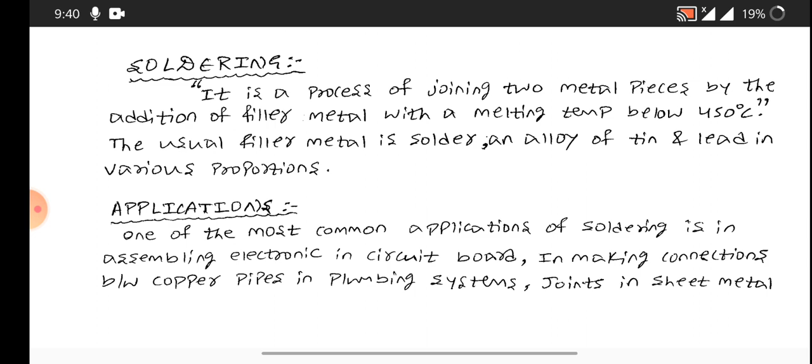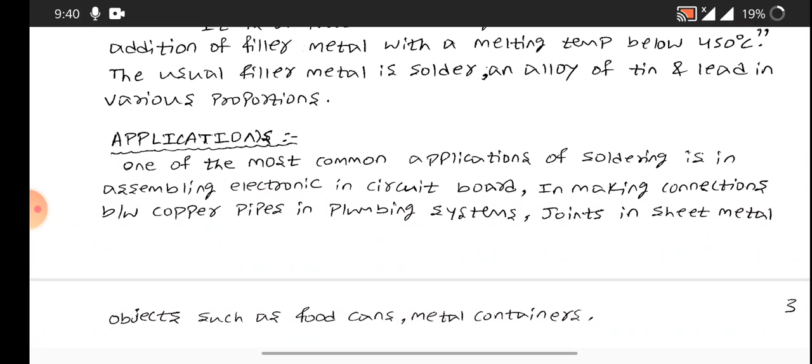So when it comes to application of soldering, the most common application is in assembly of electronic circuit boards, also in making connections between copper pipes in plumbing systems and joining sheet metals. You can find the application of soldering.

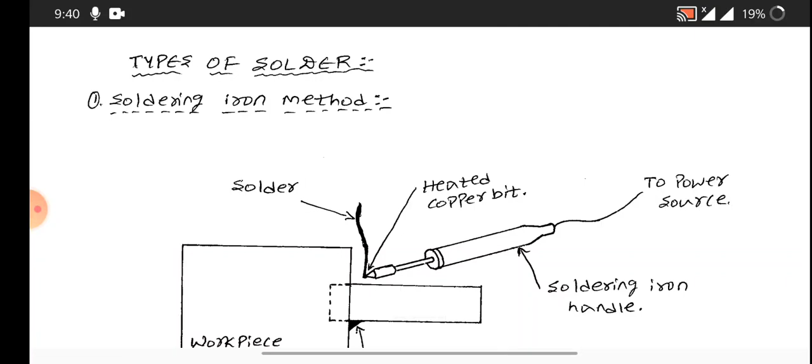So when I say soldering, there are different types of soldering methods. So we'll discuss a few. The first one is the soldering iron method. You can see the figure. So before you go for soldering, you should make sure that the workpieces to be joined are cleaned thoroughly by removing all the contaminants and making the surfaces clean and ready for soldering.

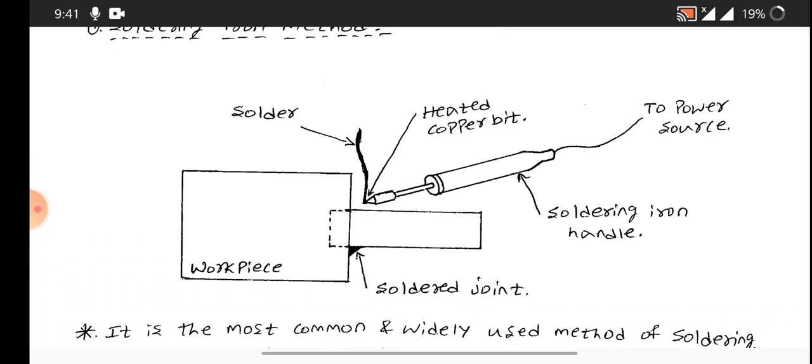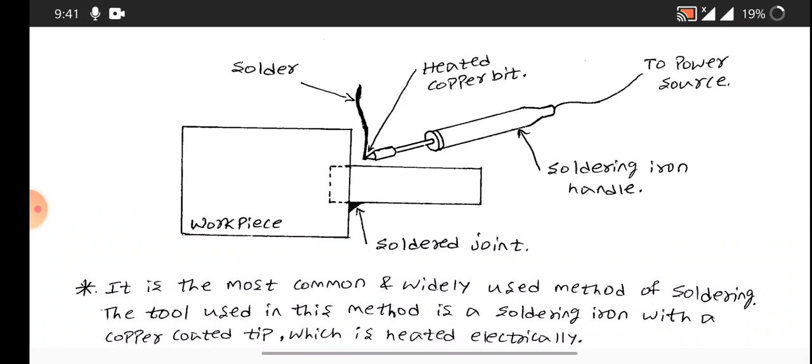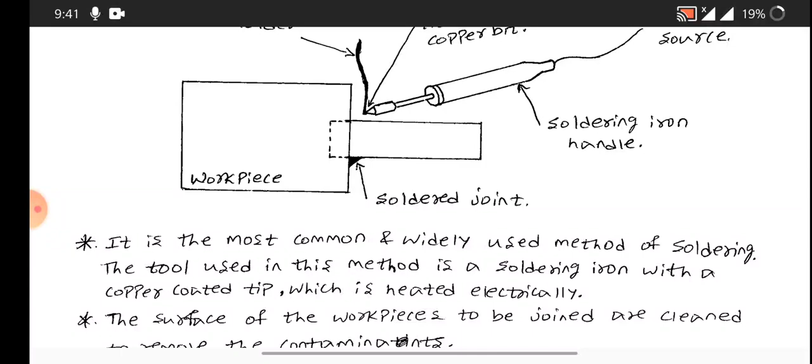So in the soldering iron method, we are going to use a soldering iron handle where we are going to melt the solder at the tip of this soldering iron handle, and the same solder is going to be transferred into the gap between the two workpieces. It is the most common and widely used method of soldering. The tool used in this method is a soldering iron with a copper coated tip which is heated electrically. So we need power supply for this.

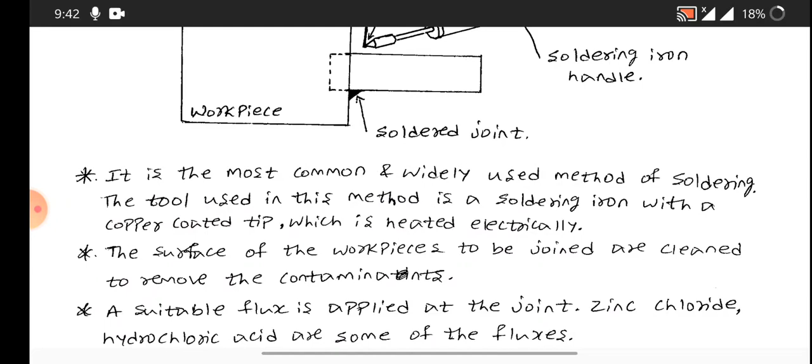So the surfaces of the workpiece to be joined are cleaned to remove all the contaminants, as I said. We have to use a suitable flux which is going to be applied at the joint in order to avoid oxidation. The commonly used fluxes are zinc chloride, hydrochloric acid, etc.

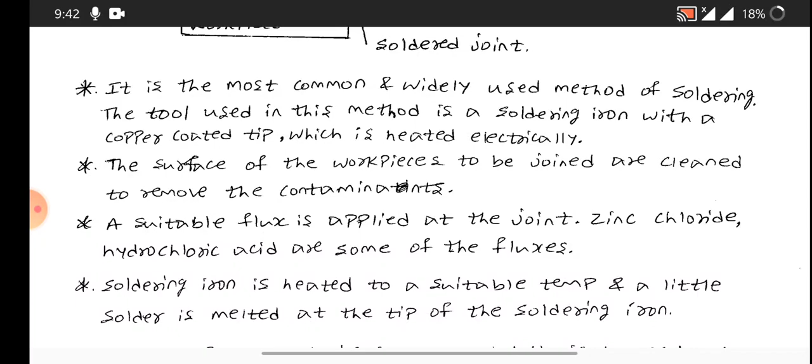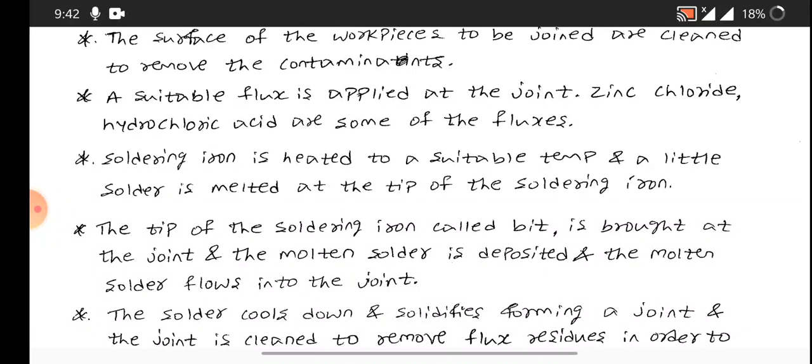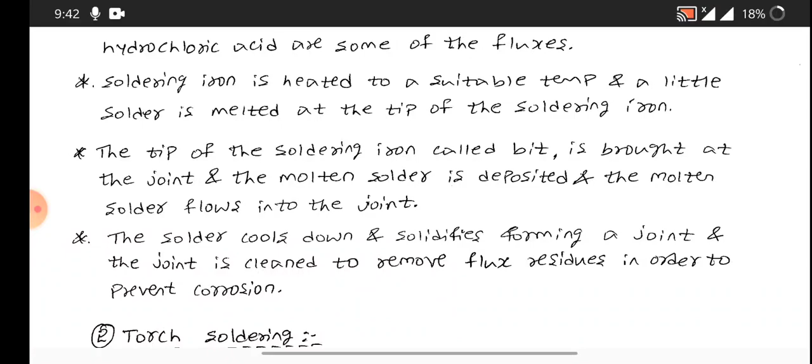So in the process, first we need to heat the soldering iron to a suitable temperature, and a little solder is melted at the tip of the soldering iron. The tip of the soldering iron is brought to the joint, and the molten solder is transferred, or you can say deposited, and the molten solder flows into the joint. Then you should allow the solder to cool and let it solidify, forming a joint, and the joint is cleaned to remove the flux residues in order to prevent corrosion.

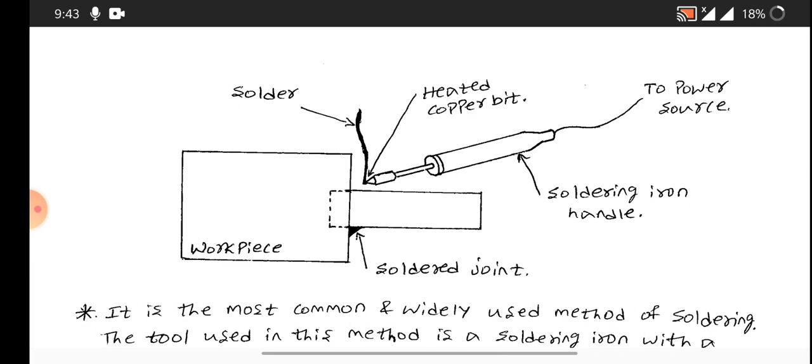So you can see the figure. We have two workpieces, and wherever there is a joint, we need to get the soldering iron, and at the tip of the soldering iron we need to melt the solder, and the same solder is transferred into the joint, and the solder is going to flow into the joint, fill up the joint, and we're going to get the soldering joint.

So the next type is torch soldering. See, when I say soldering, the working is the same in all the types, but the only difference is the method of heating or method of melting the solder. In torch soldering, the required heat is supplied by the flame of an oxyacetylene gas torch. We know what oxyacetylene welding is, which we discussed in the previous session. So the same oxyacetylene mixture is used in a gas torch in order to supply the heat to melt the solder.

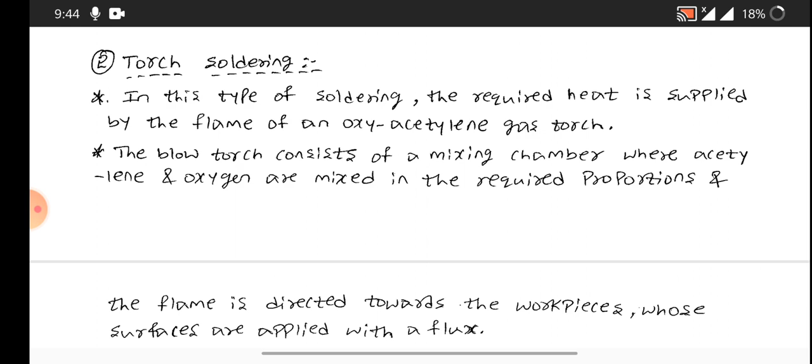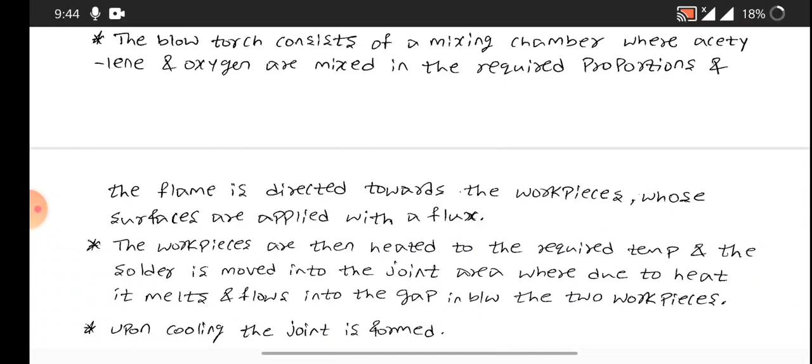So the blowtorch consists of a mixing chamber where the acetylene and oxygen are mixed in the required proportions, and the flame is directed towards the workpiece whose surfaces are applied with the flux. And one more thing, when you go for soldering, first you need to heat the workpieces to be joined, then you should go for depositing the filler metal, that is solder. When the workpieces are heated to the required temperature, the solder is moved into the joint area where due to heat it melts and flows into the gap between the two workpieces.

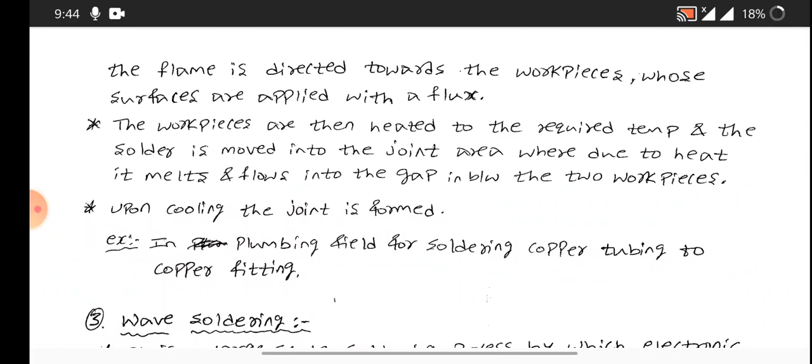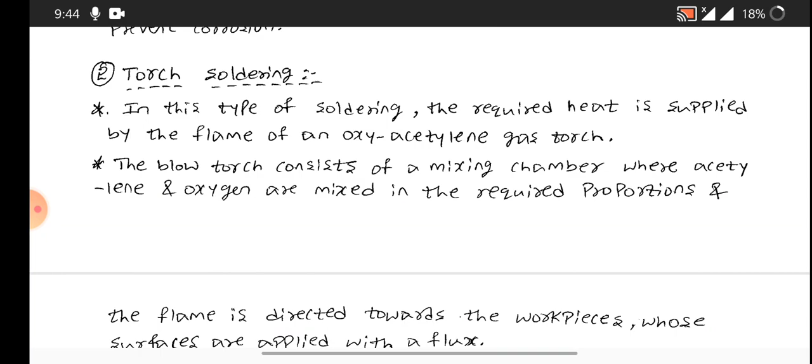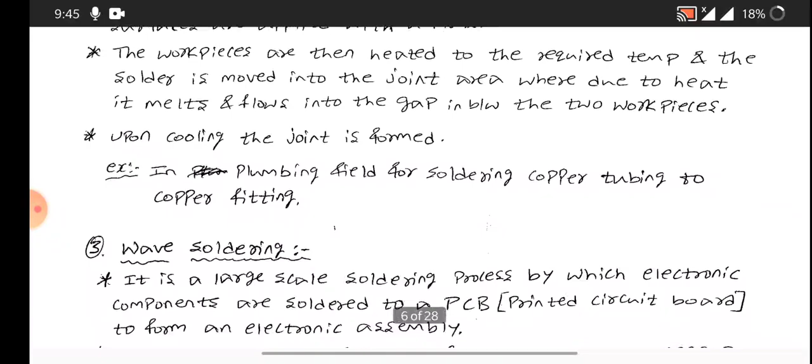So in this method you can see we are using the heat of the oxyacetylene flame in order to heat the workpieces. Once the workpieces are heated to the suitable temperature, we are going to transfer the solder into the gap of the workpiece so that it will melt because of the heat of the workpiece, and we should allow it to solidify so that we can get a joint. And for applications, you can see the plumbing field, for soldering copper tubing to copper fittings.

Then the third one is wave soldering. Again, it is a soldering method which is used in electronic industries, where electronic components are soldered to a printed circuit board to form an electronic assembly.

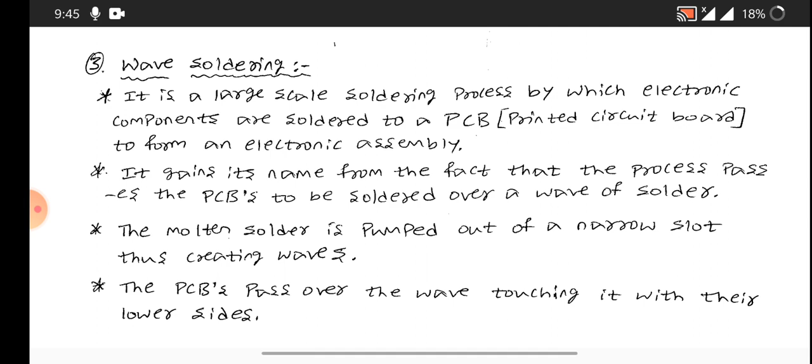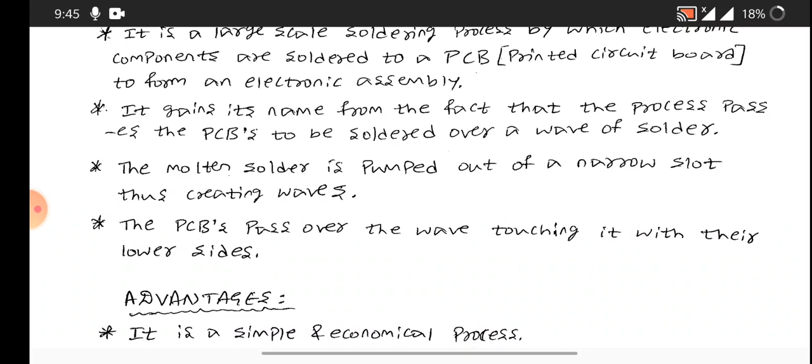So in wave soldering, the method is very simple. The name wave soldering is given because the PCBs which are to be soldered are passed through a wave of solder, that is filler metal. The molten solder is pumped out of a narrow slot, thus creating waves. And when the waves are created, these PCBs are passed over the waves, touching them with their lower sides, and you get the soldering joint.

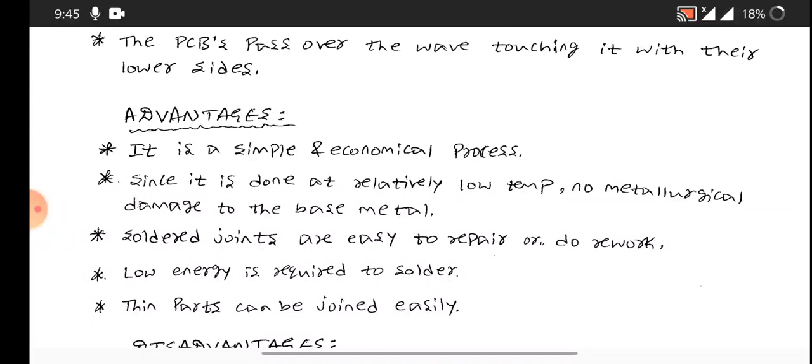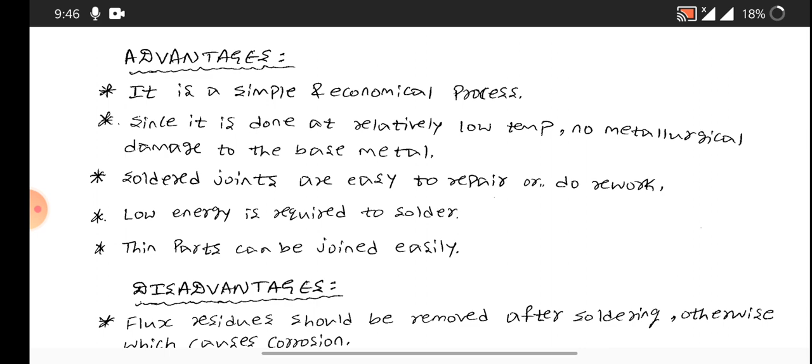So when it comes to advantages of soldering, in general it is a simple and economical process. Second, since it is done at a relatively low temperature, there is no metallurgical damage to the base metal. As we know, in welding, the arc you generate has a very high temperature. At this high temperature, there are chances that the microstructure of the base metal may get altered. But in soldering, there is no such problem as we are dealing with very low temperature.

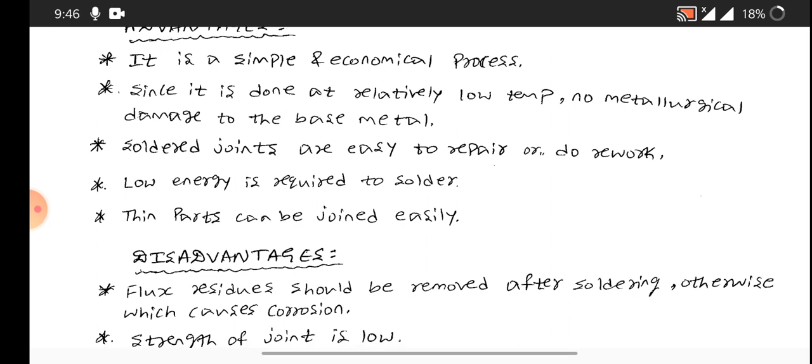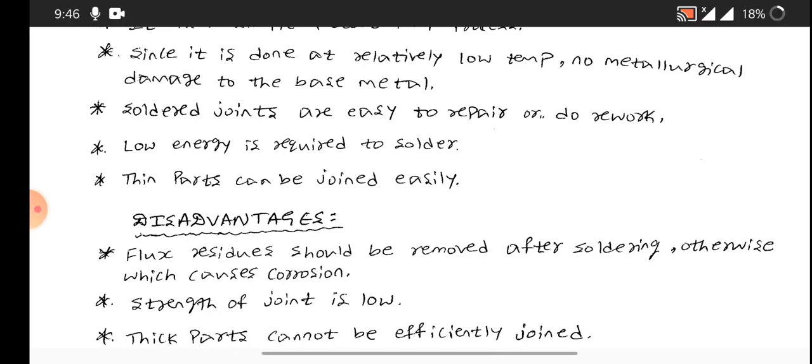Third, soldering joints are easy to repair or rework. Then low energy is required to solder, and thin parts can be joined very easily. In welding, it is very difficult to join thin parts, so that drawback can be overcome by this soldering method. So along with these advantages, there are a few drawbacks.

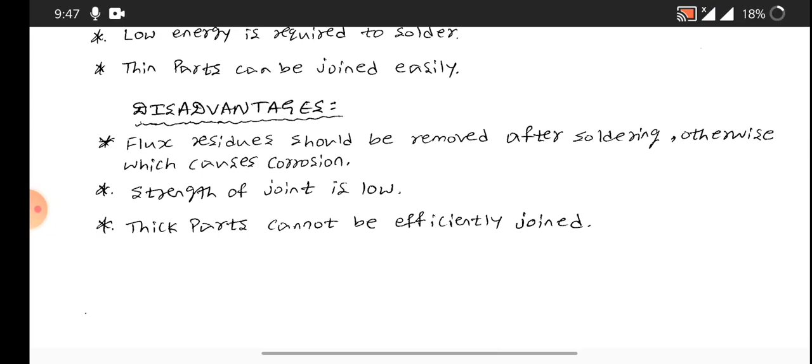First, the flux residue should be removed after soldering. As we know, we are using flux. Once the soldering is completed, we need to remove this flux, otherwise it causes corrosion. Then the strength of the joint you get in soldering is a little bit weak. And last, thick parts cannot be joined efficiently.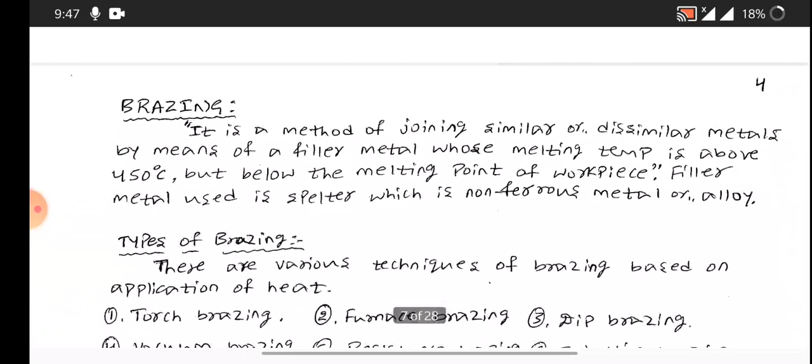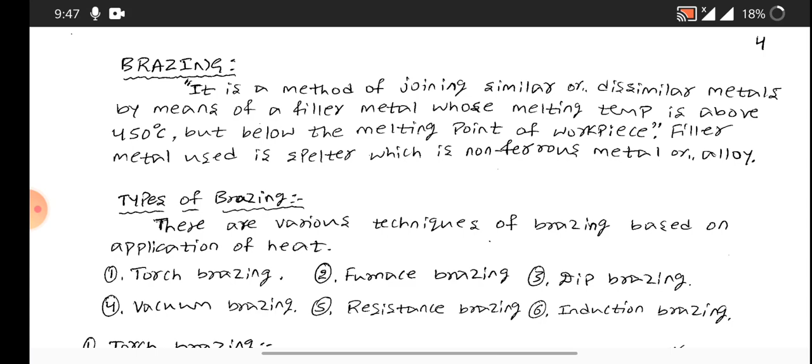Now we'll discuss what brazing is. The difference between brazing and soldering is, here also we join similar or dissimilar metals by means of a filler metal, but its melting point is above 450 degrees centigrade. In soldering it was below 450, but here it is above 450 degrees centigrade. But it should be below the melting point of the workpiece. The filler metal used in brazing is called spelter, whereas in soldering it was solder. Spelter is a non-ferrous metal or alloy.

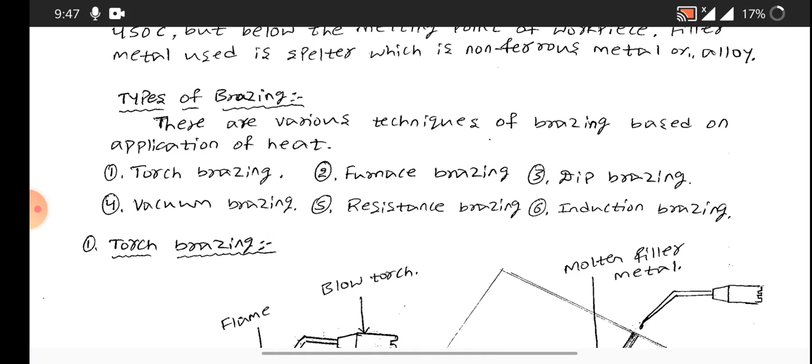We have different types of brazing, like torch brazing, furnace brazing, dip brazing, vacuum brazing, resistance brazing, and induction brazing. We'll discuss a few types just for your knowledge. So the first one is torch brazing. So what is torch brazing? Very simple. You can see the figure.

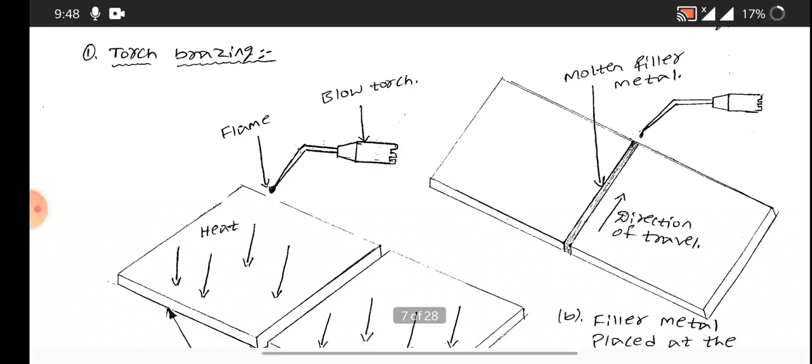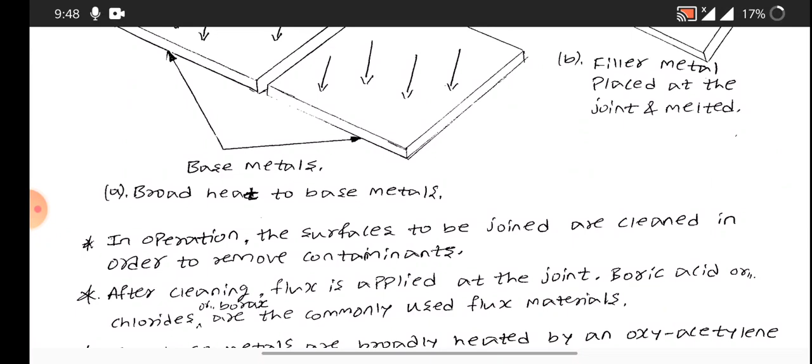In torch brazing, we use a blow torch through which we produce the flame. Before the brazing operation, you should ensure that the surfaces to be joined are cleaned in order to remove all the contaminants. After cleaning, the flux is applied at the joint. Generally the flux used here is boric acid, borax or some chlorides.

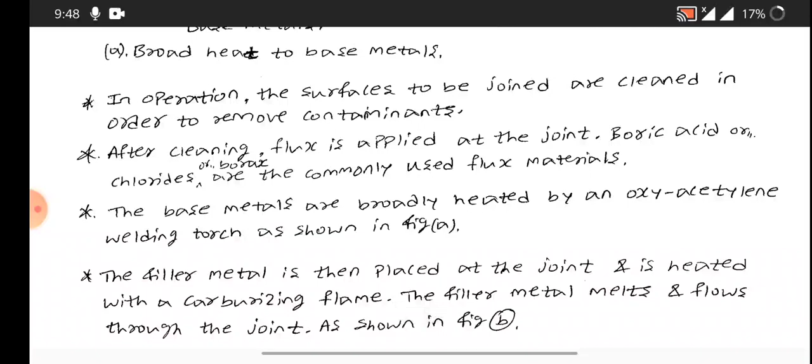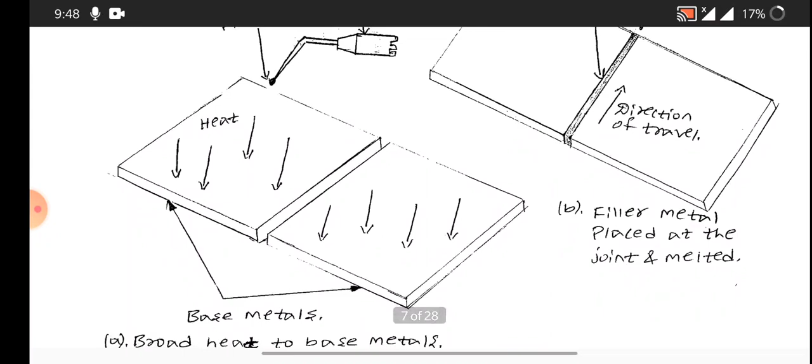The base metals are broadly heated by an oxyacetylene welding torch as shown in the figure. With the blowtorch, we produce the flame by burning the oxyacetylene mixture. Once we get the flame, it is used to heat the workpieces. Once the workpieces are heated, the filler metal is placed at the joint.

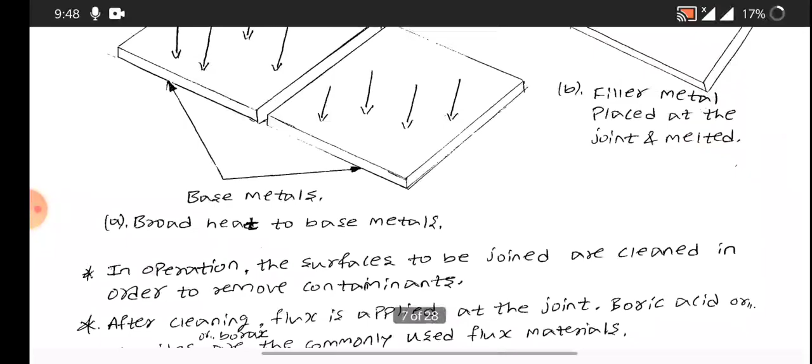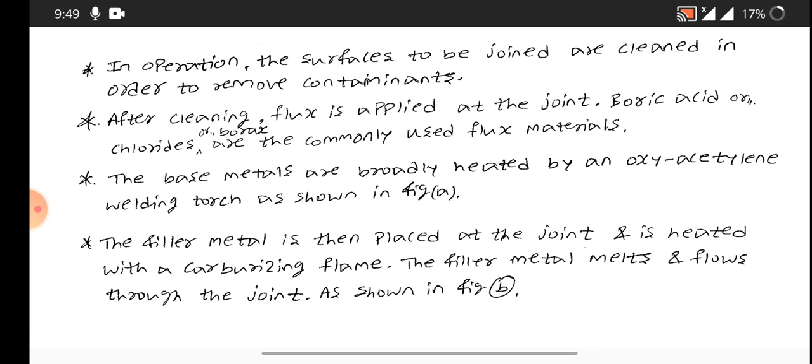The filler metal is placed at the joint and heated with a carburizing flame. So what is a carburizing flame? We mix oxygen and acetylene to produce the flame. If the percentage of acetylene is more, it is called a reducing or carburizing flame. If the proportion of oxygen is more, it is called an oxidizing flame. And if they are mixed in equal proportion, it is called a neutral flame. So here we use a carburizing flame.

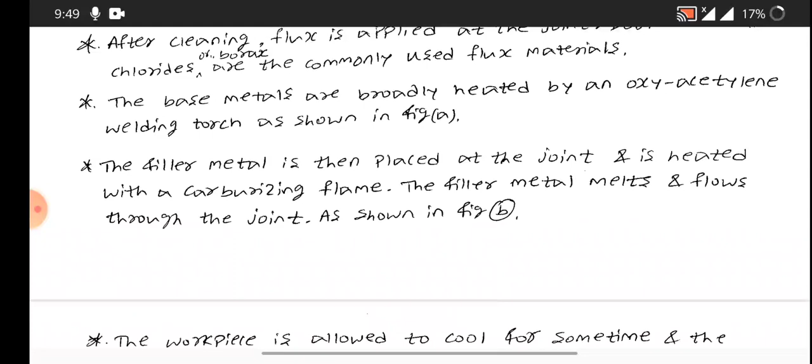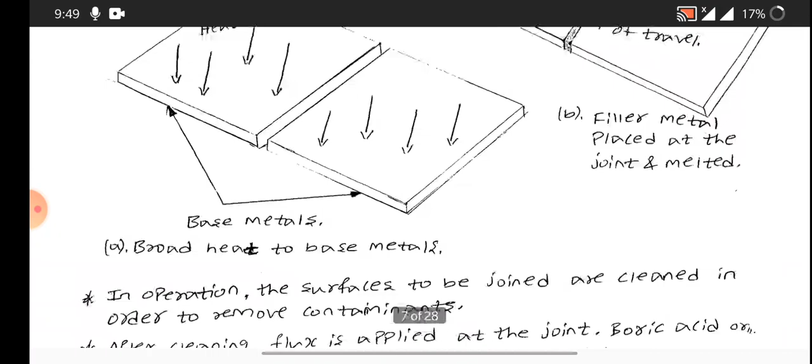When this carburizing flame is directed towards it, the filler metal melts and flows through the joint as shown in the figure. You can see here we have placed the filler metal. Once we place the filler metal, we use the carburizing flame.

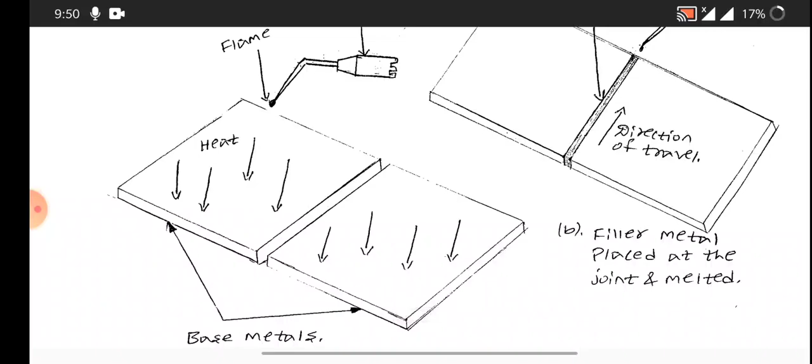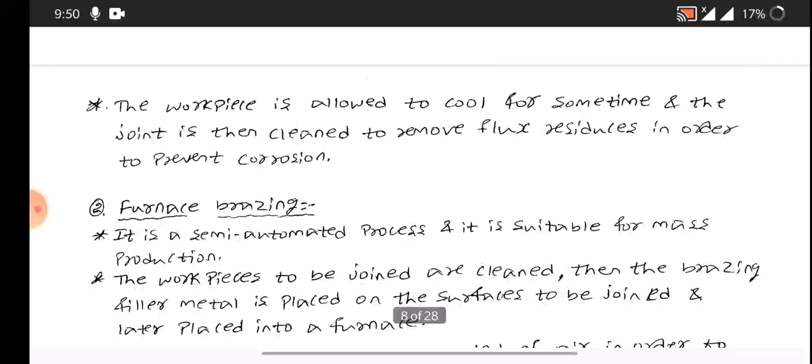It will melt the spelter and it will deposit into the joint, and we should allow it to cool so that it solidifies and we get a joint. The workpiece is allowed to cool for some time and the joint is then cleaned to remove flux residues in order to prevent corrosion. Then the second one is furnace brazing.

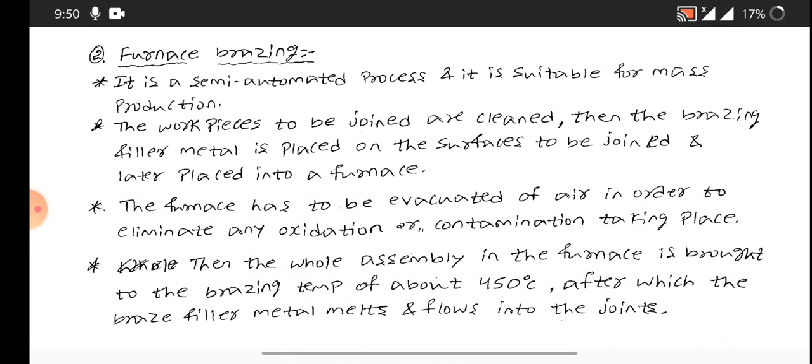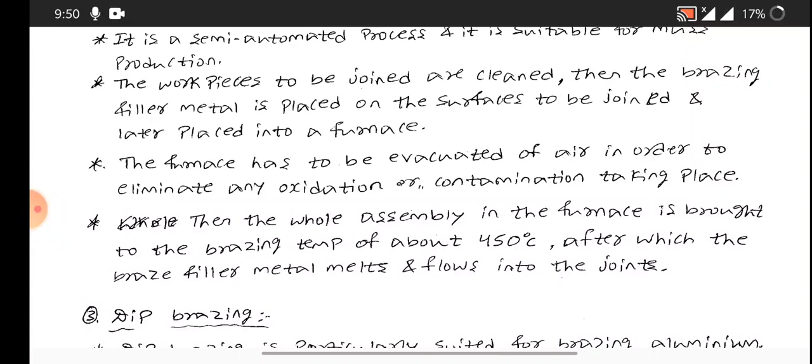It is also a very simple brazing method, which is also called a semi-automated process and is suitable for mass production. So here again, first we should clean the workpieces to be joined, then brazing filler metal is placed on the surfaces to be joined and later placed into the furnace. The furnace has to be evacuated of air in order to prevent any oxidation or contamination.

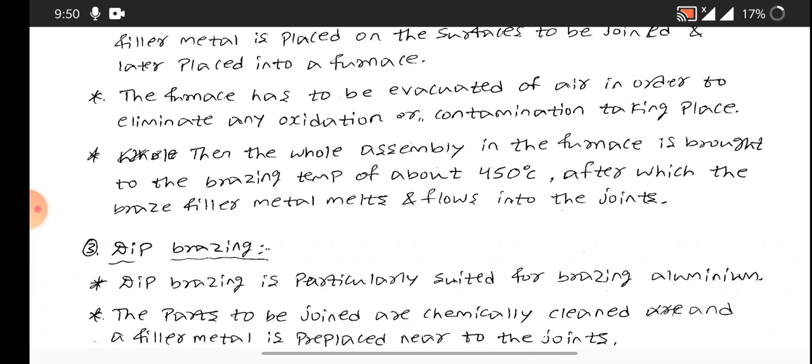Once you remove the air, the whole assembly inside the furnace is brought to the brazing temperature of about 450 degrees centigrade or more, after which the brazing filler metal, that is spelter, melts and flows into the joint. And the third one is dip brazing. Again, it is a very useful brazing method. It is particularly suited for brazing aluminium.

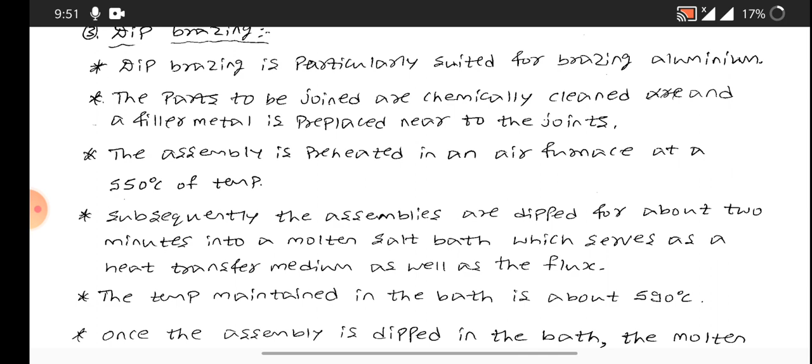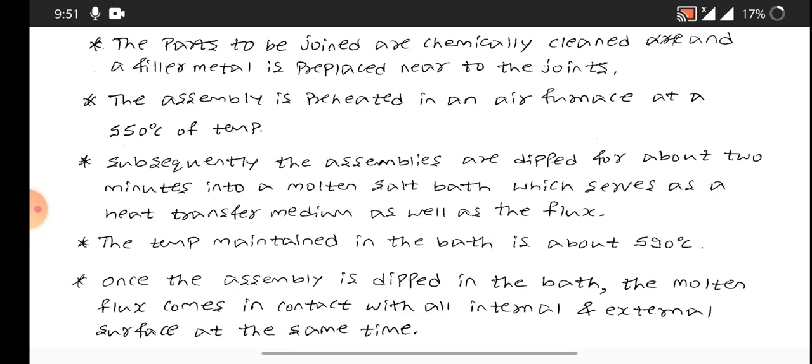So again, here first you should clean the parts. Once cleaning is done, the filler metal should be placed in the joint. Then the assembly should be preheated in an air furnace at about 550 degrees centigrade. Once preheating is done, the filler metal melts, flows through the joint and deposits into the joint, and this entire assembly is dipped in a molten salt bath for about 2 minutes, which serves as a heat transfer medium as well as the flux.

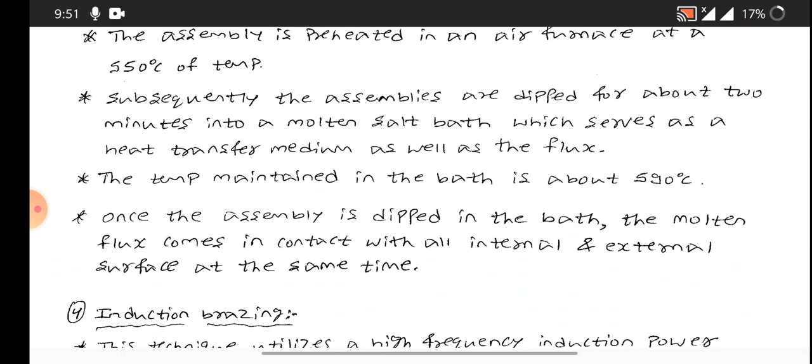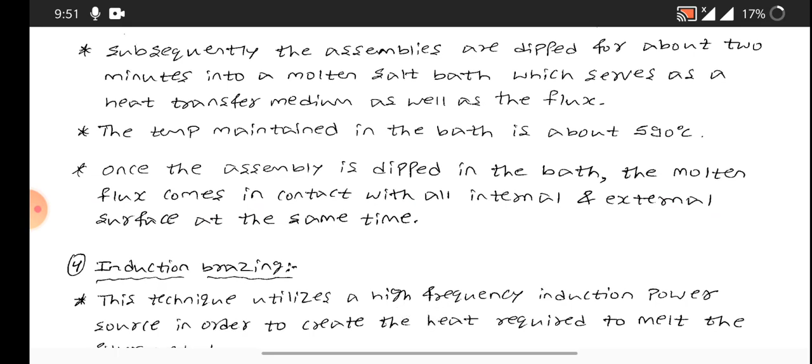The temperature maintained in the bath is about 590 degrees centigrade. Once the assembly is dipped in the bath, the molten flux comes in contact with all the internal and external surfaces at the same time, and after 2 minutes you should remove it and clean all the flux in order to prevent corrosion. Two more types are there, but they are not required for you.

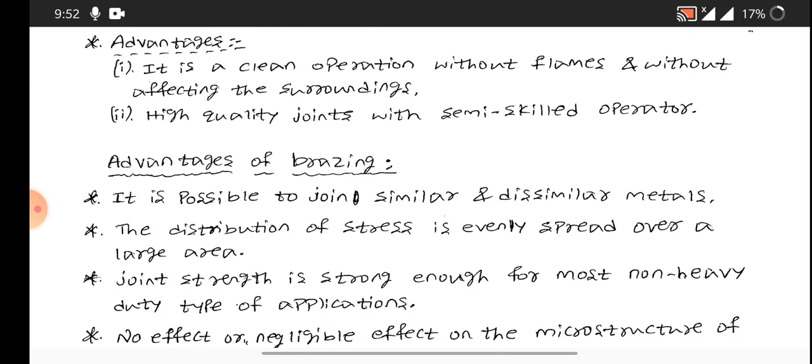Then if you look at the advantages of brazing, it is a clean operation without flames and without affecting the surroundings. In soldering we use a flame, but here we are not using a flame, so it is a clean operation and it will not affect the atmosphere. And here high quality joints can be obtained with a semi-skilled operator.

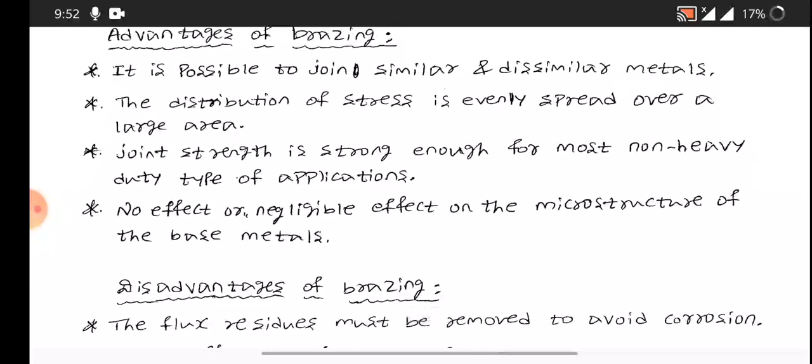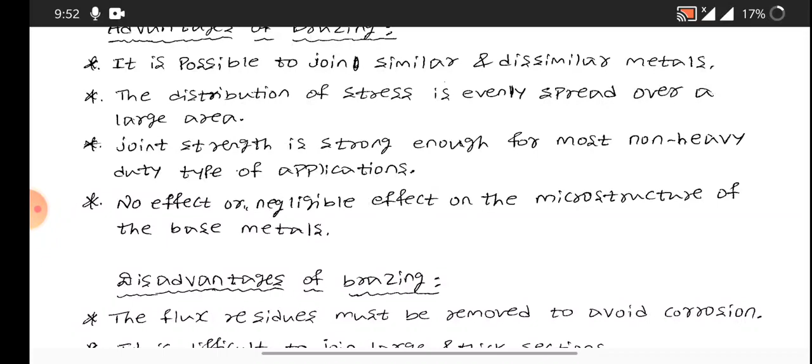Some more advantages are there. It is possible to join similar and dissimilar metals. Here the distribution of stress is uniform over a larger area, the joint is stronger compared to a soldering joint, and there is negligible effect on the microstructure of the base metal as we are dealing with very low temperature.

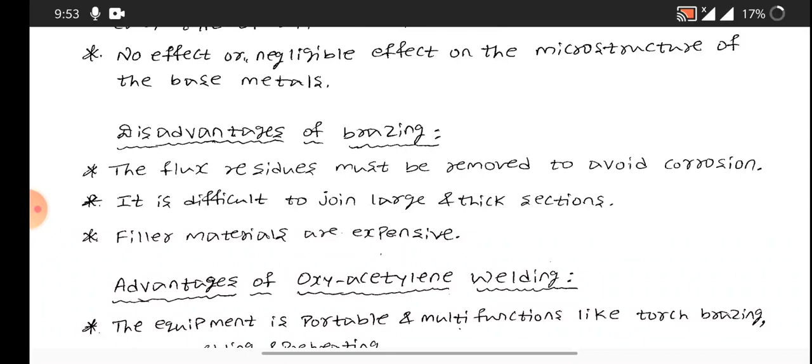When it comes to disadvantages, since we are using flux, the flux residues should be cleaned thoroughly after brazing in order to prevent corrosion, it is difficult to join large and thick sections, and the filler metals used in brazing are very expensive.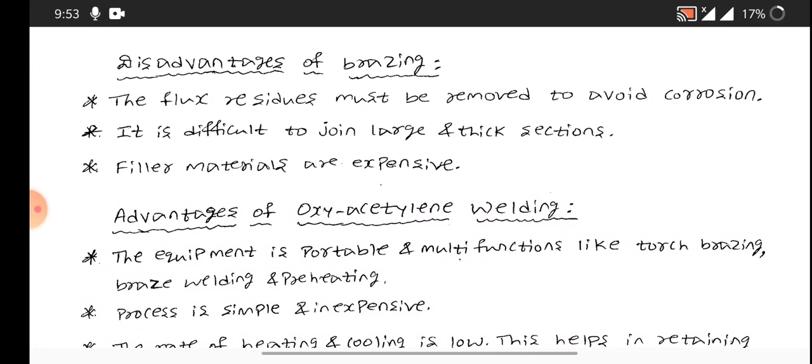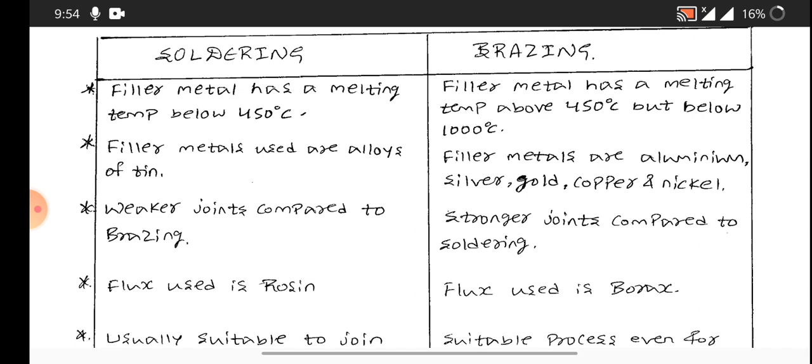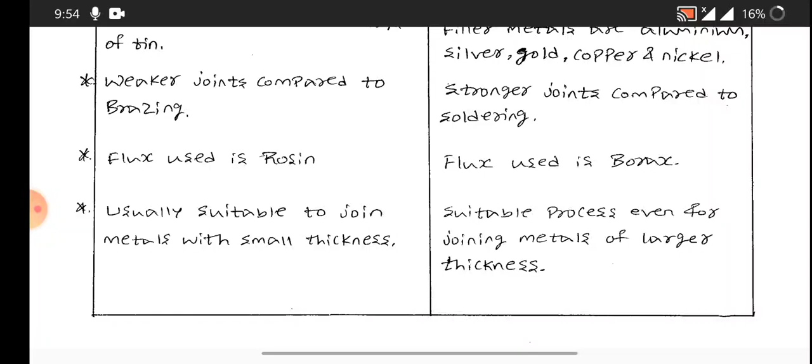Then in soldering, the joint you get is weaker compared to brazing, whereas in brazing the joints are stronger. The flux used in soldering is called rosin, whereas the flux used in brazing is borax. And soldering is usually suitable to join metals with small thickness, whereas brazing is suitable for joining metals with larger thickness.

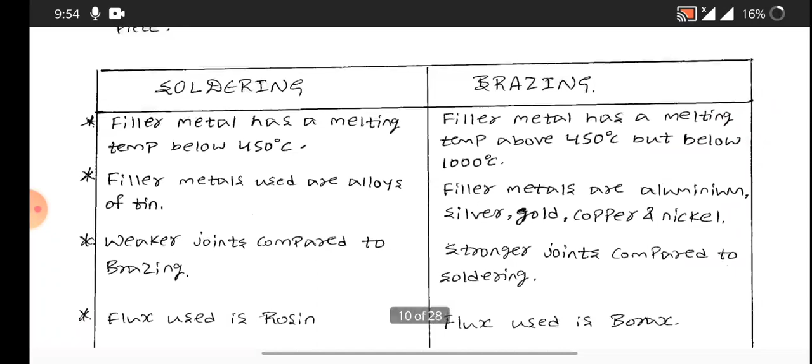Okay, now we have completed the joining processes, that is welding, soldering and brazing. In the next session, hopefully we'll start belt drives and go through the different types of belt drives. Then we have some derivations, which we'll discuss in the next class.